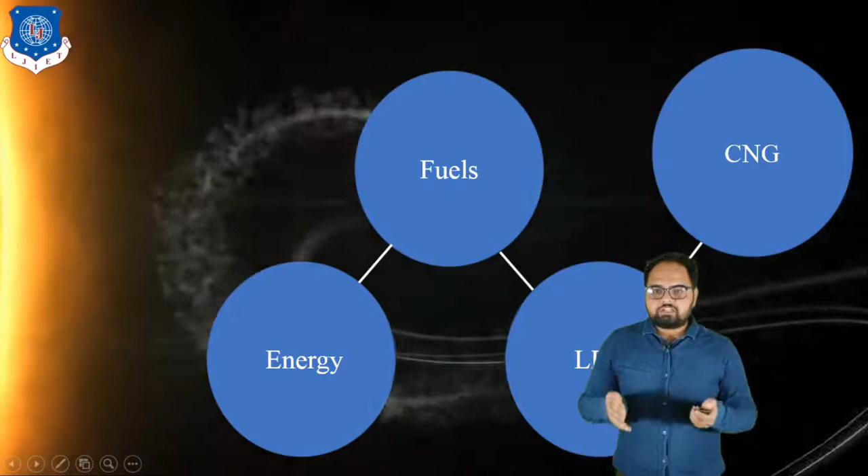Today in this video session, we will discuss the subject Basic Mechanical Engineering. Today we will discuss the topic energy. So in energy, we will discuss energy, fuels, LPG and CNG. So let's start with energy. So first of all, what is energy?

Energy means the ability to do work, and we know that according to the first law of thermodynamics, energy can neither be created nor destroyed, but it can be converted from one form to another. The sources of energy can be divided into two ways: the first one is renewable sources of energy and the second one is non-renewable sources of energy.

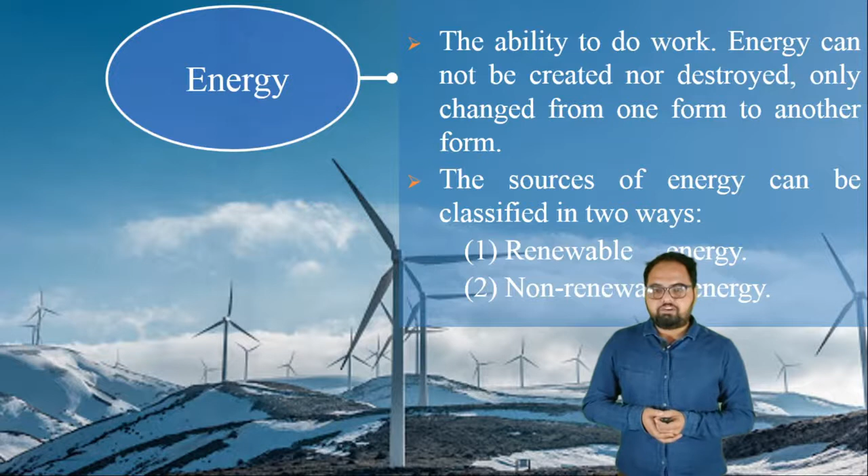So let's start with the first one, renewable sources of energy. Renewable energy is obtained from sources that are not exhaustible. They can be continuously used, like wind energy and solar energy. These energy sources are also called non-conventional energy sources.

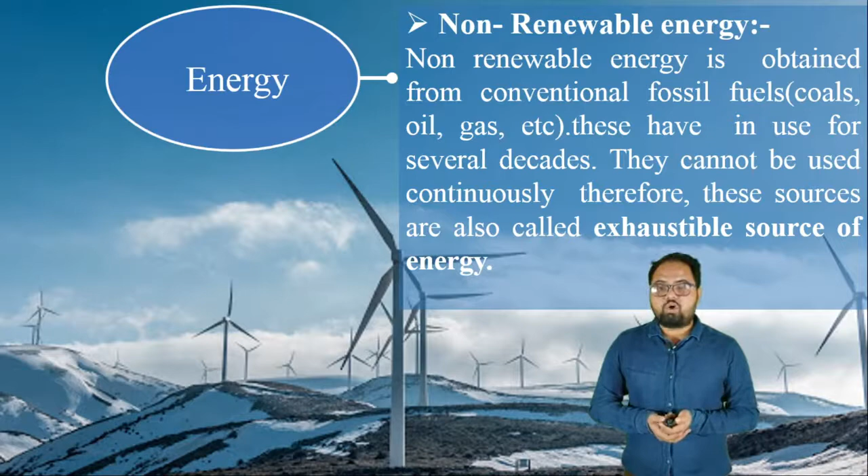Non-renewable energy is obtained from conventional fossil fuels like coal, oil, gas, etc. These have been in use for several decades and they cannot be used continuously. Therefore, these sources are also called exhaustible sources of energy. The first one is solid fuels.

First of all, what is fuel? A fuel is defined as a combustible substance containing carbon as its major constituent, which is able to produce a large amount of heat that can be used for domestic and industrial purposes. The main solid fuels are wood, peat, lignite, coal and charcoal.

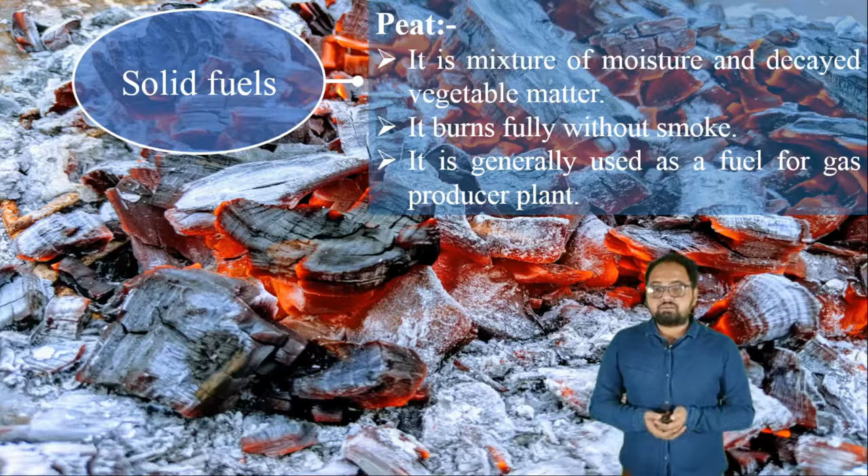First of all, wood. This is not considered a commercial fuel. However, it is still being used as a fuel for cooking and heating purposes. The next is peat. Peat is a mixture of moisture and decayed vegetable matter. It burns fully without any kind of smoke and it is generally used as a fuel for gas producer plants.

After that we will discuss coal. Coal includes all forms of coal from lignite to anthracite, which are formed from peat in the earth's crust due to pressure and heat over a long period of time, over millions of years. Its carbon content and heating value are higher than peat.

Next is charcoal. It is prepared by the dry distillation of wood. When wood is burnt with insufficient air, the volatile matter is reduced and leaves behind charcoal as a residue. It has no sulfur content and it can burn easily without any kind of smoke. It has a calorific value of around 25500 kJ/kg.

Next is coke. It is obtained by destructive distillation of soft coals in a closed chamber in the absence of air, so that the coal is decomposed thermally. This process is known as the carbonization process.

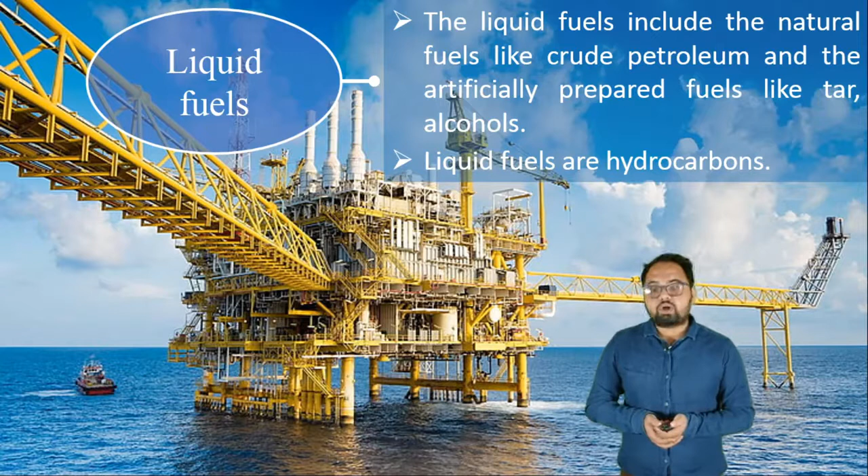Now next are liquid fuels. Liquid fuels include natural fuels like crude petroleum and artificially prepared fuels like tar and alcohols. Liquid fuels are hydrocarbons. The advantage of liquid fuels is that they have a higher calorific value. What is calorific value? It is the energy produced by burning 1 kilogram of the substance or fuel. So it has a higher calorific value.

It is easy to store and it occupies less space. We can easily control and handle liquid fuels. Changes in load in a power plant can easily be met. Now what is the meaning of it? In a power plant, whenever we require larger power, if there is solid fuel, it takes time to burn and produce heat energy.

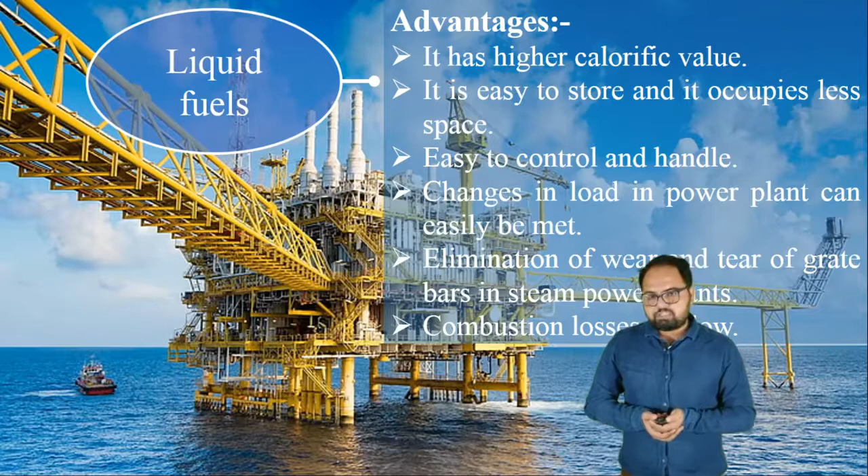But in the case of liquid fuel, we can easily produce heat energy, and with that heat energy steam can be produced, so we can easily meet the change in load requirements. Wear and tear of the grate bar in steam power plants is eliminated and combustion losses are very low.

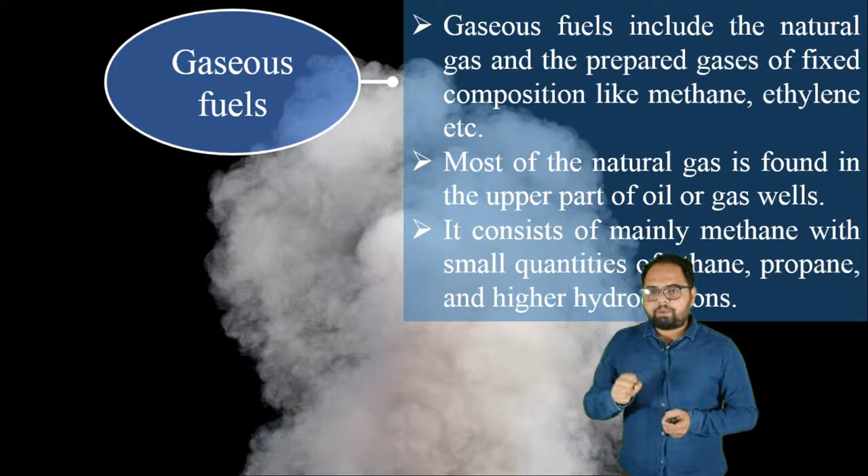The third one is gaseous fuels. Gaseous fuels include natural gas and prepared gas of fixed composition like methane, ethylene, etc. Most natural gas is found in the upper part of the oil or gas well, and it consists mainly of methane with small quantities of ethane, propane and higher hydrocarbons.

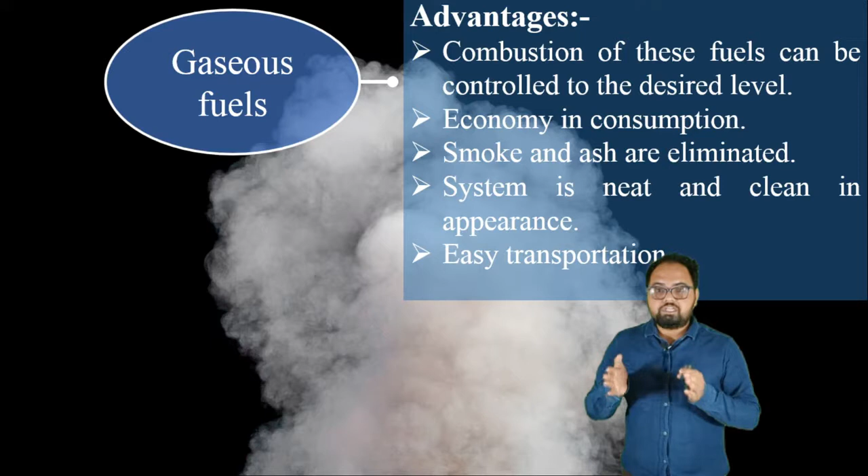The advantages of gaseous fuels are: combustion of these fuels can be controlled to the desired level, economy in consumption, smoke and ash are eliminated, the system is neat and clean in appearance, and they are easy to transport.

Next is LPG. The full form of LPG is liquefied petroleum gas. Propane and butane are gases which are obtained from oil and gas wells. During the refining process of petroleum, a considerable amount of propane and butane is produced.

Propane gas is liquefied at 8.8 bar and butane gas is liquefied at 2.1 bar at atmospheric pressure. Atmospheric pressure means 1 bar, 1.01325 × 10^5 N/m².

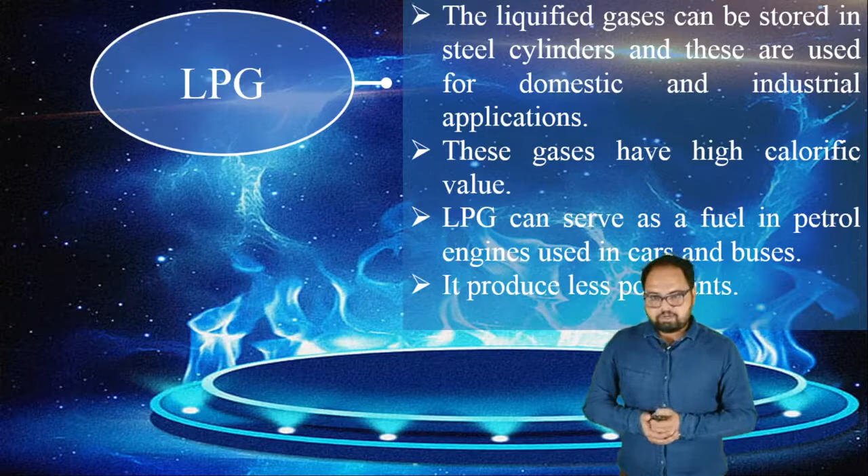The liquefied gas can be stored in a steel cylinder. We have already seen the LPG cylinders, and these are used for domestic as well as industrial applications. These gases have high calorific values. LPG can serve as a fuel in petrol engines used in cars and buses, and it produces less pollutants.

The next gas is CNG. We all are familiar with this gas because nowadays in most of the cars we are using it, and the price per kilometer will be very less as compared to petrol. So the full form of CNG is compressed natural gas. When the natural gas is compressed, it is known as CNG, and in CNG methane is the main constituent.

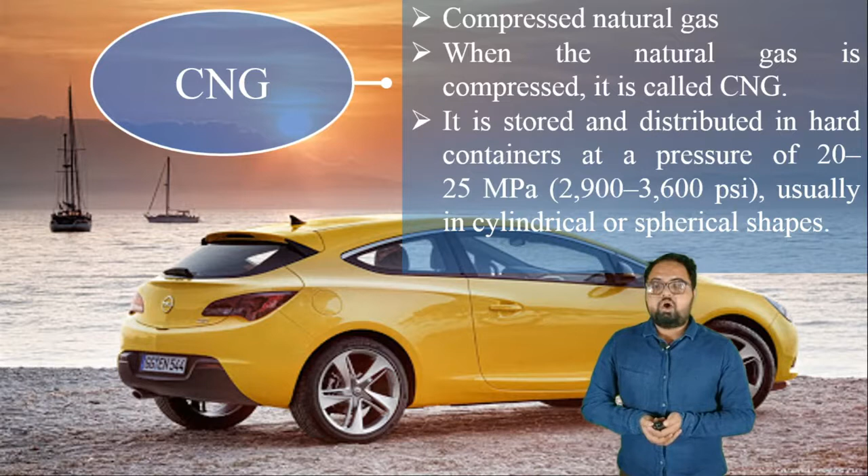It is stored and distributed in hard containers at a pressure of 20 to 25 megapascal, which is equal to 2900 to 3600 psi, usually in cylindrical or spherical shapes. CNG can be used to run automobiles with the help of a CNG conversion kit. CNG conversion kits are used to convert petroleum driven cars into CNG driven cars, and it is lighter than air and disappears quickly when released to the atmosphere.

The advantages of CNG: low maintenance cost than other hydrocarbon fuel powered vehicles. CNG fuel systems are sealed, preventing fuel losses from evaporation. CNG mixes easily and evenly in the air, less pollution and more efficiency is obtained by using CNG, and it increases the life of lubricating oil.

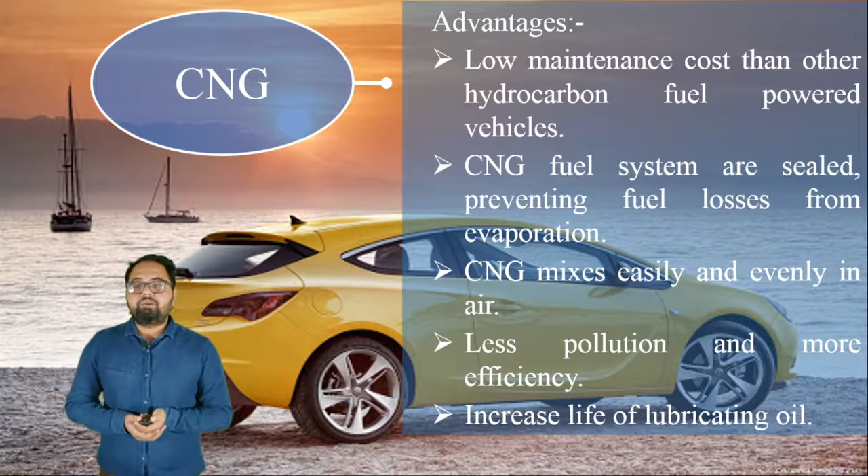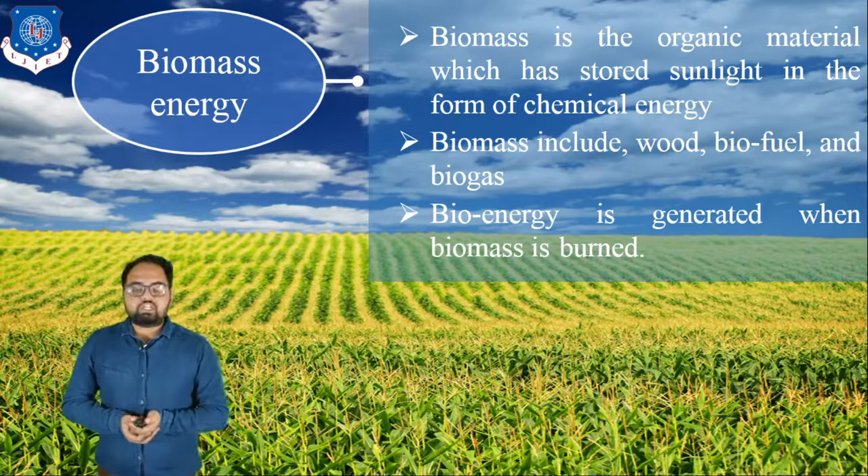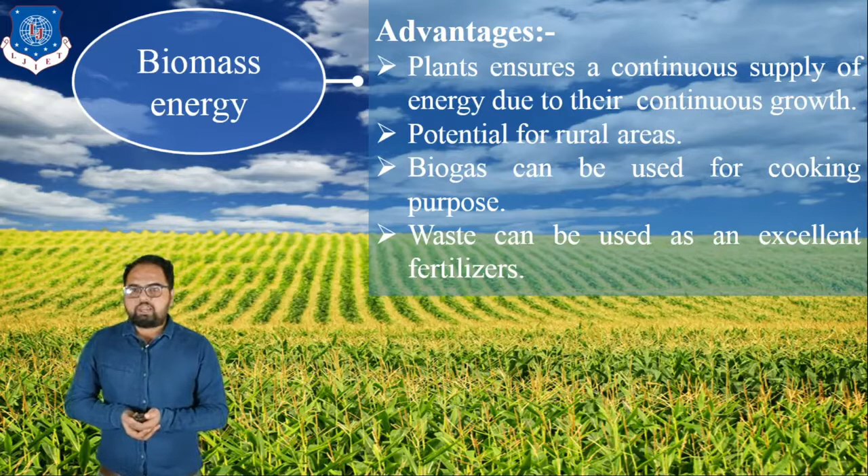The next one is biomass energy. Biomass is the organic material which has stored sunlight in the form of chemical energy. Biomass includes wood, biofuel and biogas, and bioenergy is generated when biomass is burned. The advantages of biomass energy: plants ensure a continuous supply of energy due to their continuous growth. Potential for rural areas. Biogas can be used for cooking purposes. Waste can be used as an excellent fertilizer.

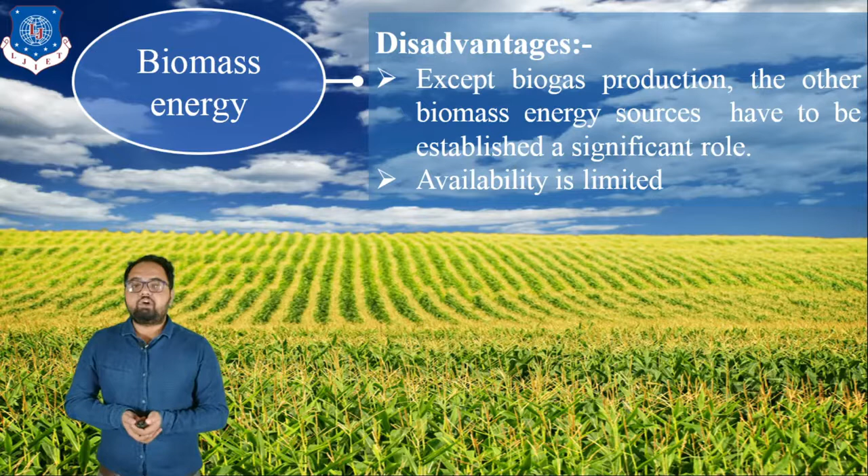The disadvantages of biomass energy: except biogas production, the other biomass energy sources have yet to establish a significant role, and availability of this energy is limited.

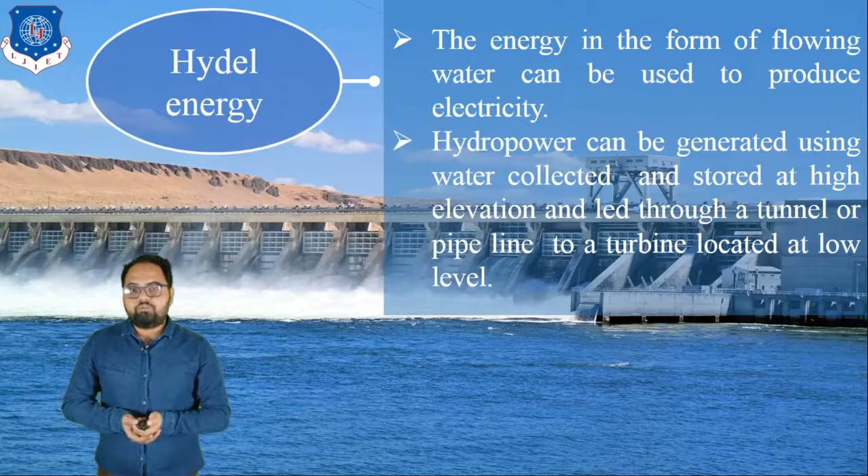Next is hydel energy. The energy in the form of flowing water can be used to produce electricity. Hydropower can be generated by using water collected and stored at very high elevation and led through a tunnel or pipeline to the turbine located at a low level. And the minimum height for the waterfall must be 10 meters.

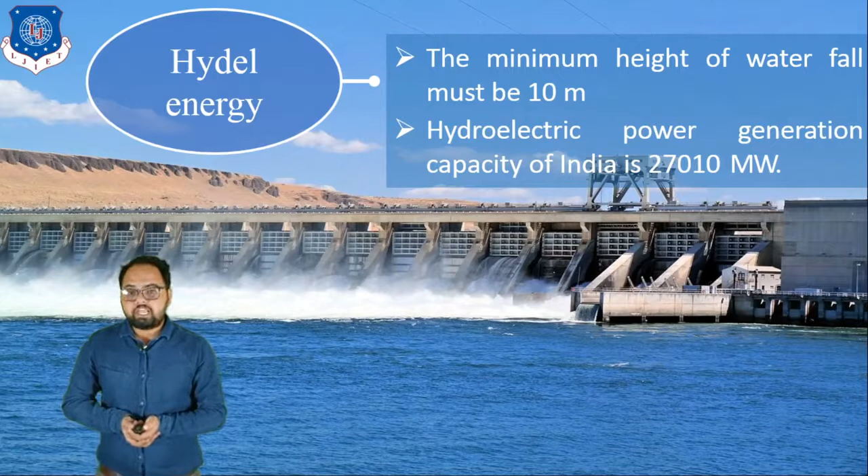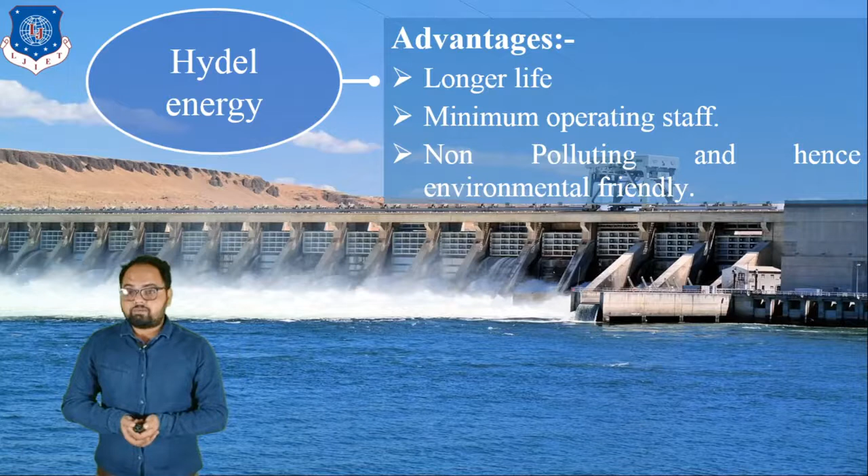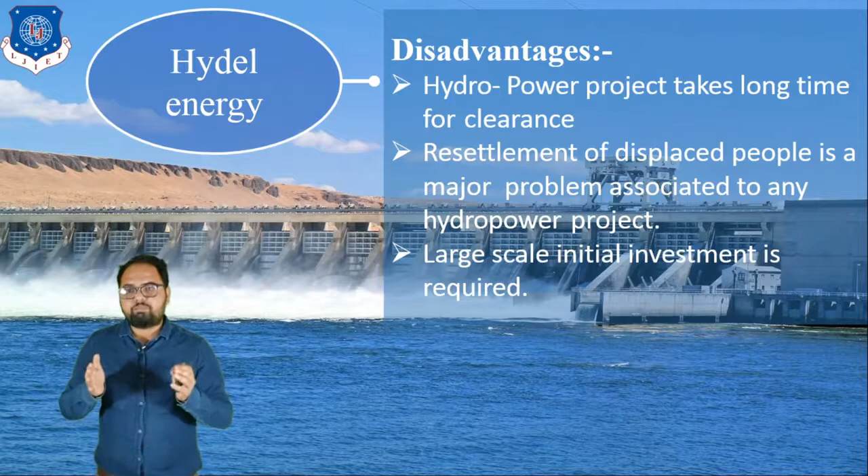Hydroelectric power generation capacity in India is around 27010 megawatt, and the advantages are the longer life of the mechanical components, minimum operating staff required, and it is non-polluting, hence environment friendly. So what are the disadvantages? Hydropower projects take a long time for clearance. Resettlement of displaced people is the major problem associated with any hydropower plant. Large scale initial investment is required because lots of money is required to build up the civil structure.

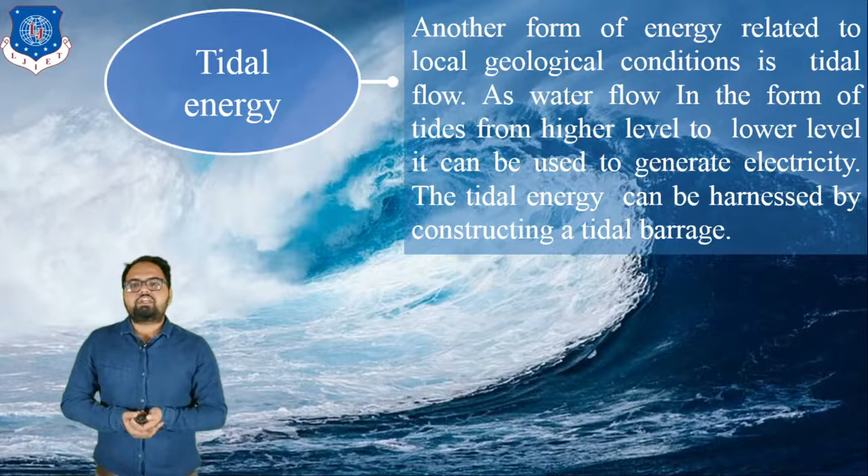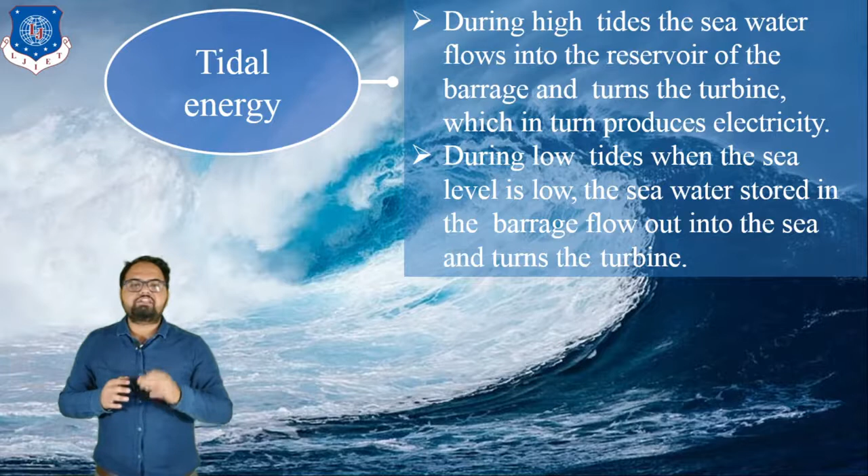The next one is tidal energy, another form of energy which is related to local geological conditions. As water flows in the form of tides from high level to low level, it can be used to generate electricity. Tidal energy can be harnessed by constructing a tidal barrage. During high tides, the sea water flows into the reservoir of the barrage and turns the turbine, which in turn produces electricity. During low tides, the sea water stored in the barrage flows out into the sea and turns the turbine. By this way, we can produce electrical energy.

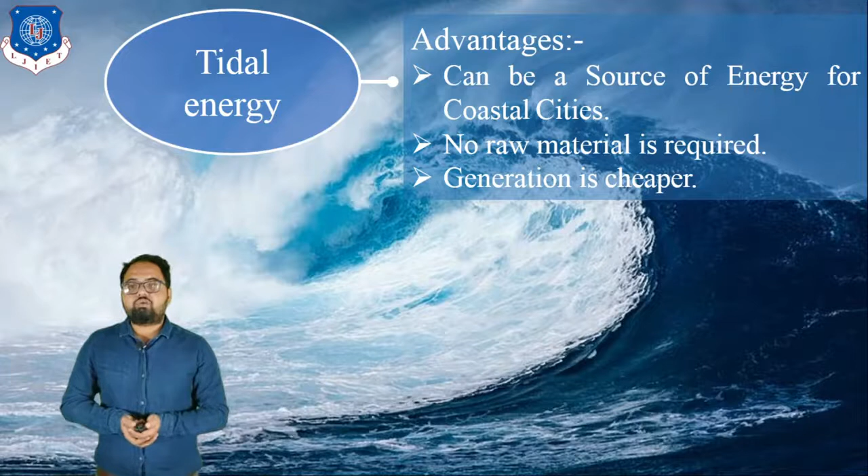The advantages: it can be a source of energy for coastal cities. No raw material is required and generation of energy is very cheap. Disadvantages: the availability is for limited duration and varies with time and location. Generation capacity is less. Operational difficulties during bad weather.

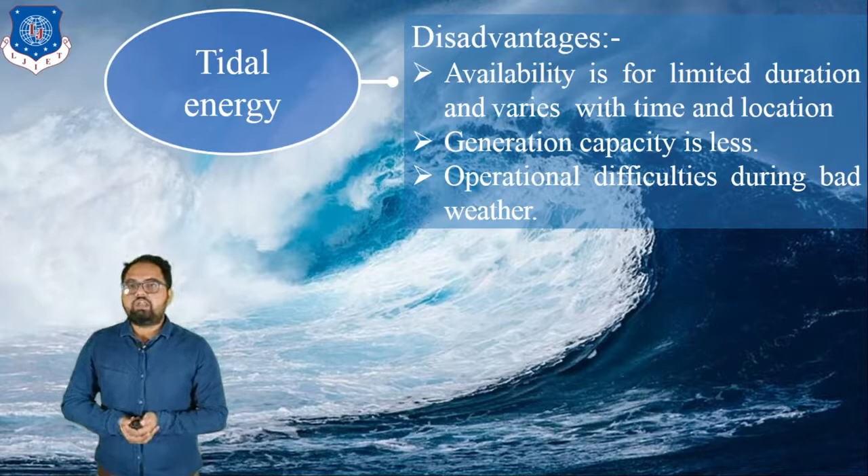The last one is geothermal energy. Geothermal energy means the heat of the earth. We know that the earth's core has a temperature of around 60,000 degrees Celsius and is a molten mass possessing a vast amount of energy. This energy sometimes breaks through the earth and produces volcanoes. And the steam is then used to run electric generators.

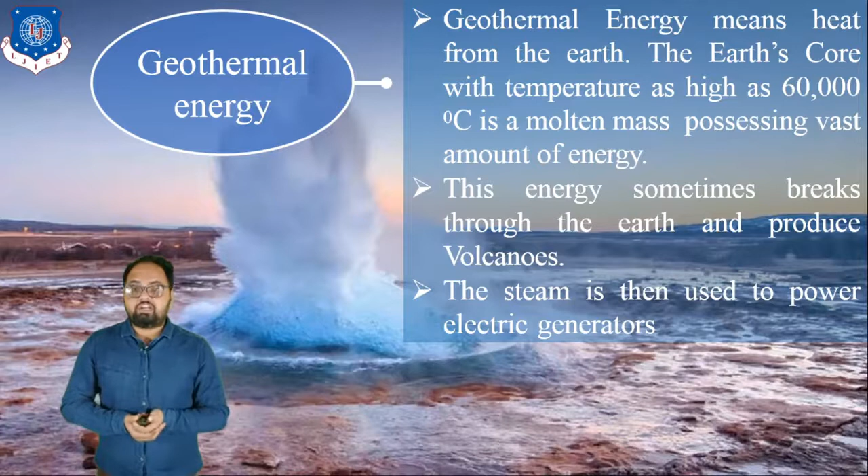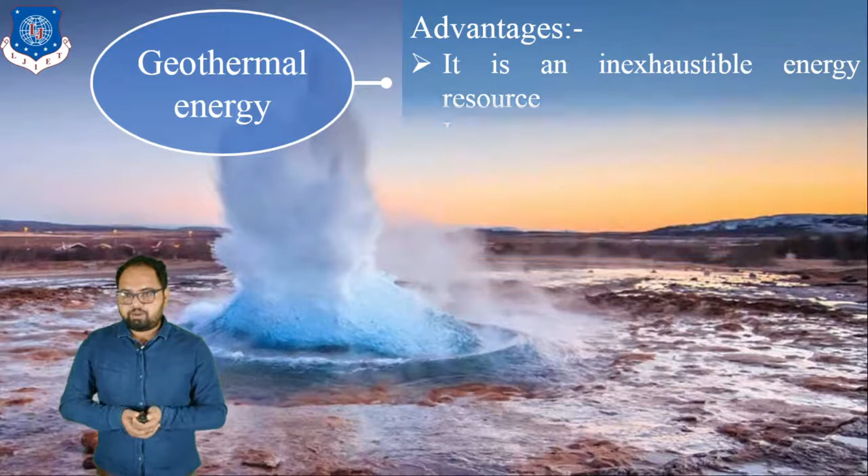The advantage is, as it is an inexhaustible energy resource, it is very cheap, and it is good for hilly and remote areas where no other energy sources are available. There are certain disadvantages. These hot springs are generally away from areas having potential for industrial development. The steam energy has to be used on site, as it cannot be carried over longer distances due to loss of energy and the cost factor. So this is all about geothermal energy.